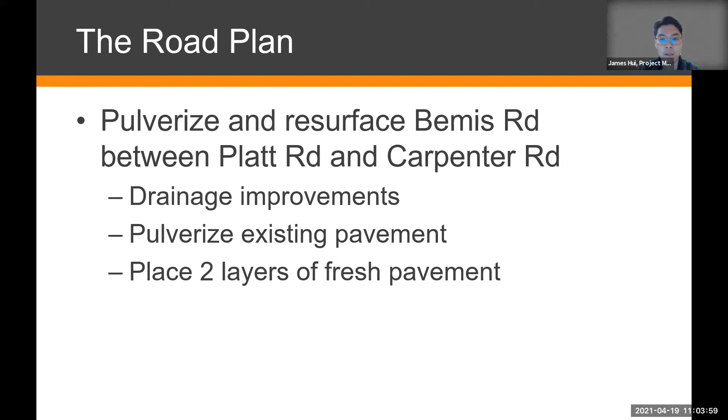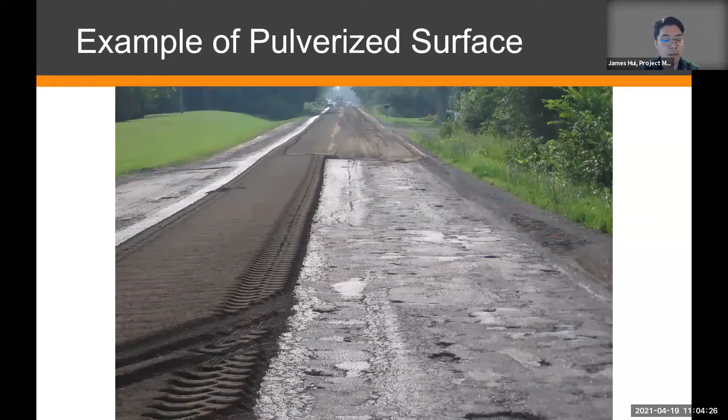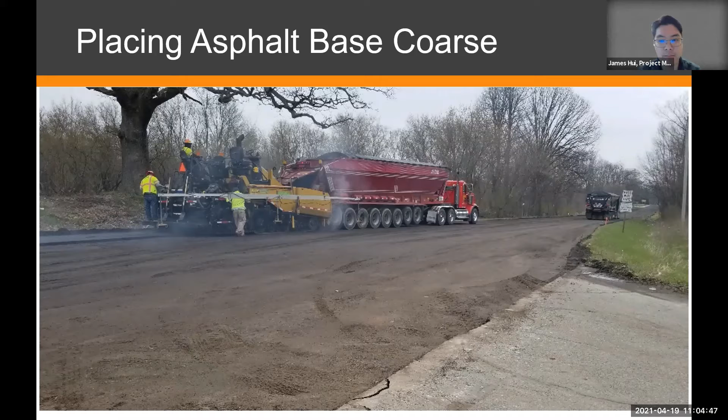So once we pulverize it, we'll definitely have to tamp it down and make sure it is stable before we put our asphalt down. So here's a picture of us actually putting asphalt material down on a pulverized surface on a separate project. Next slide. And I will pass this off to Brent to talk about his intersection job.

Thanks, James. So the intersection of Bemis and Carpenter was included in the countywide millage that was voted on by the residents within Washtenaw County, and it was slated for this coming year in 2021.

So we went through and designed the intersection. It was planned as a traffic signalized intersection through the millage. Whenever we look to improve this intersection, we look at the intersection as a whole, and we look at the laneage. There were currently left turn lanes on Bemis Road, and there was actually a right turn, southbound right turn lane on Carpenter. So it just made sense to finish and widen it out based on the right of way that we had available.

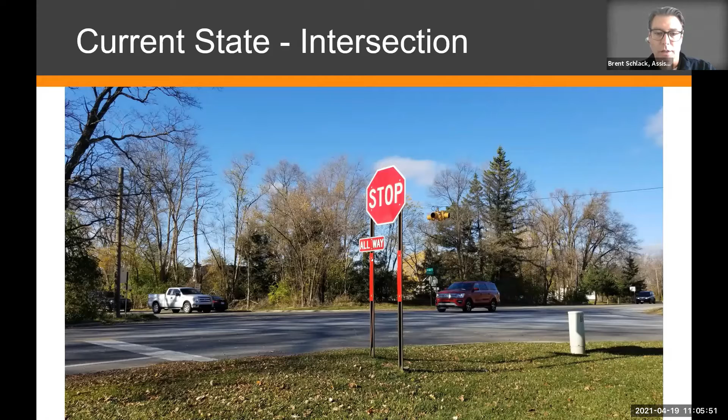It just made sense to continue with the traffic signal. So we will be widening Carpenter Road to include, through the schedule of events, there are a couple utilities that will need to be relocated. We'll be widening the road for a center left turn lane on Carpenter Road. This will include new curb and gutter on the radiuses for the intersection.

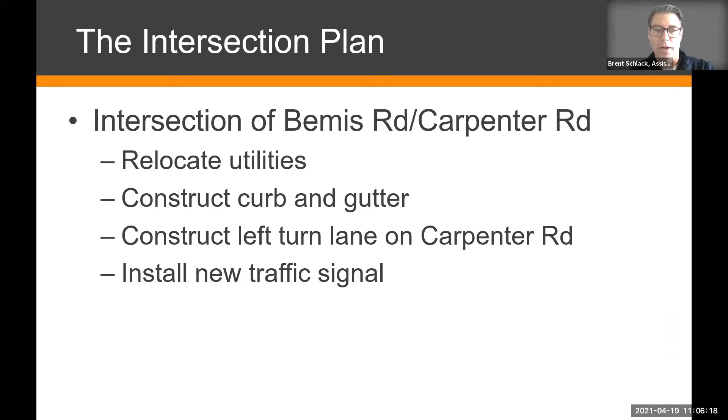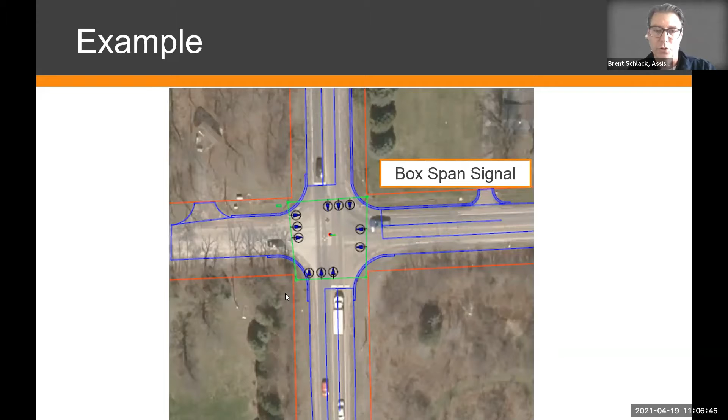So just to talk about the timeline and construction schedule, Bemis Road is slated to start as early as next Monday. This is when we'll start working on the ditching work and removing and replacing a bunch of the culverts. It's slated to finish around late May to early June, really depending on the weather and our contractor's schedule. We'll definitely provide a more detailed schedule once we receive it from the contractor.

And then the intersection itself will start after the resurfacing work is done. We're anticipating this to be in mid-June at the earliest, and it'll take about 8 weeks.

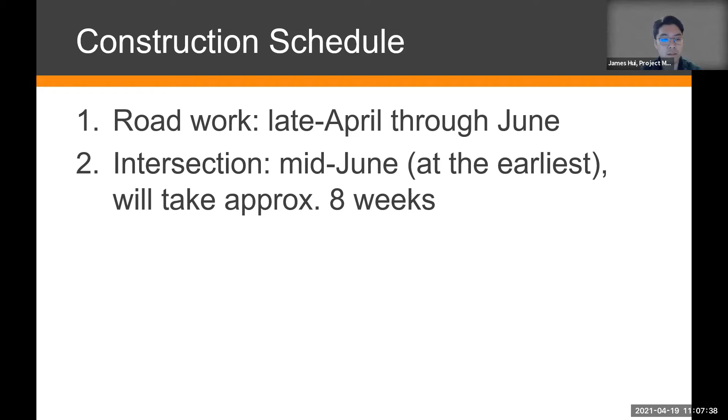For impact to traffic, Bemis Road, while we do the resurfacing, will be closed to through traffic. This means those that work and live within our project limits are still allowed access to the property, but other traffic utilizing this road as through traffic will not be allowed. The intersection, when we do the work, will remain open. There will be intermittent shoulder or lane closures, but the intersection will be open through the project.

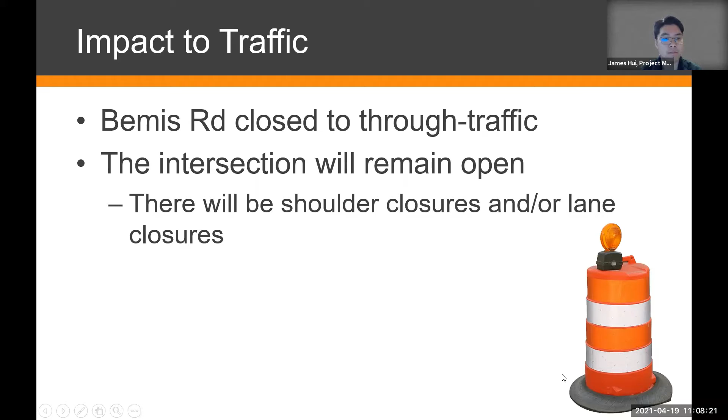As hard as it is to believe, road closed signs don't always help everybody understand that roads are closed. We've had a lot of incidences where people drive through signs, ignoring our closures and warning signs. If you do see a road closed sign, please be aware and adhere to it.

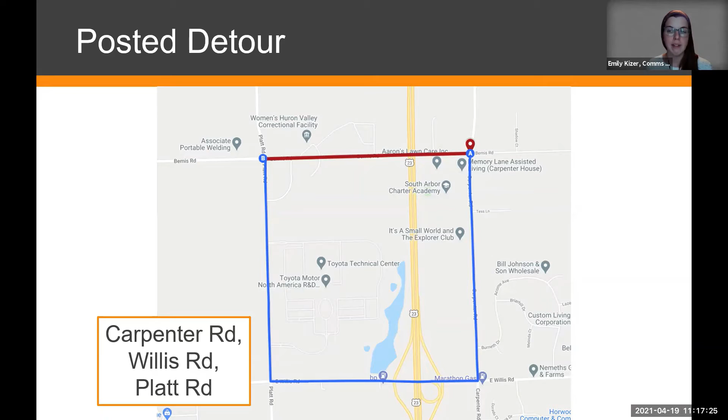Thanks, Aaron. Yeah, I think it's really important, the safety part. As Aaron mentioned, we've seen incidents of people violating work zones, and we've actually seen some fatalities—fortunately not with our employees or contractors, but certainly of road workers in the county. So we really ask people, those signs do apply to you. We will provide you access to your home if you live within that work zone. But if you don't live within the work zone, please follow the detour or find an alternate route, because it really comes down to safety for you as a driver, and for the workers out there.

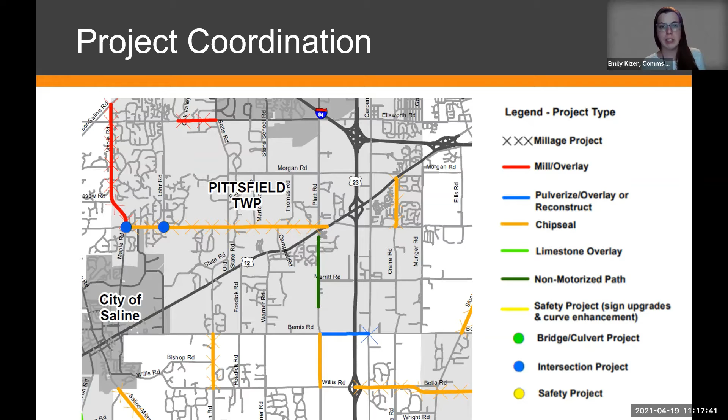We also mention that the closure applies to pedestrians, and it applies to people using bicycles. So really, if you don't need to be in the work zone to get to your home or business, we ask that you stay out of the work zone, and we'll try to get this road reopened as quickly as we can.

So with that, I'm going to pause my screen share here for a second. I'm going to show you how you can find out more about this project.

So if you go to the Road Commission's website, wcroads.org, that's what I'm showing you here. We have a lot of information here to provide a wide variety of information for the public. One of the things we spend a lot of time updating in spring and summer is our roadwork information. So if you go to roadwork and construction and find our current projects map, James mentioned we do have a lot of projects in this area. This is a great place to find all the information as we go into the construction season.

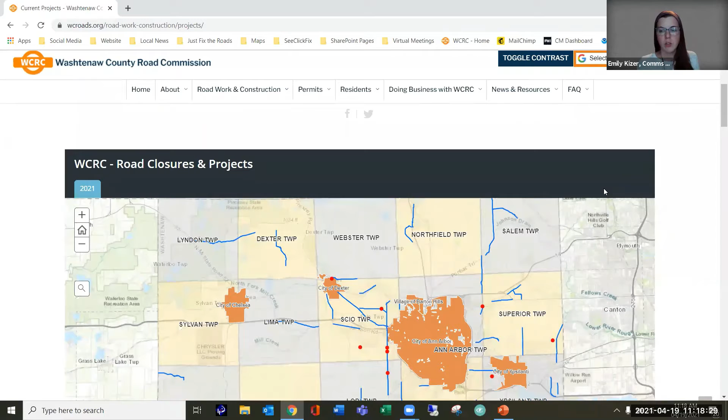If you're a maps person, you can find the map of all our current projects here. These are our major projects, generally classified as primary roads. You can see the road and intersection project on Bemis Road. If you click on the road segment, you can open this more info, which is the project page. If you go back to the map, if you're not a maps person—well, we all are at the Road Commission, we love maps—but we also have the projects listed here in a tile. Either way, it'll get you to the project page.

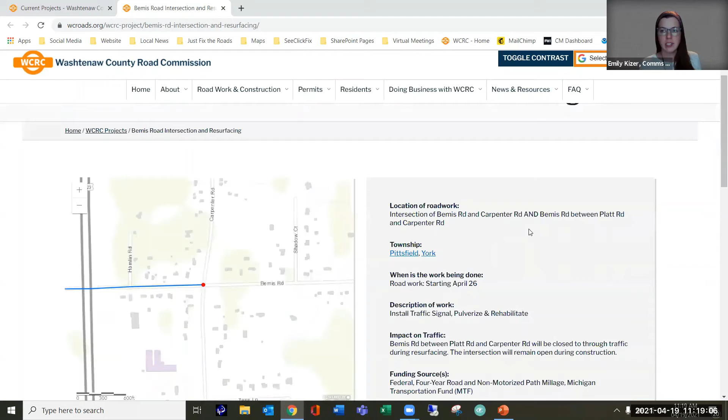Each of these major projects has a page like this. Here's the one for Bemis Road, the intersection and resurfacing. You can find some of the details here. Then we've got James's contact information, a link to the detour map, and information about today's meeting.

And right here, you can click to subscribe to receive project updates. If you'd like an email update, we'll try to send one about once a week or so, depending on how the project is going. You can subscribe to receive them here—just click this button, and it'll take you to this page where you can subscribe to receive all sorts of road updates.

Shameless plug—we do a lot of other road updates, not just project-specific ones. So you can put your email address in there. We do advisories about road work by township. So if you're interested in things going on in York Township or Pittsfield Township, you can subscribe to receive those alerts here.

You can also say you want to receive our weekly roadwork schedule that we send out. We just sent our first one for the season last week. That goes out every Thursday morning, and it's a look ahead at what roadwork we anticipate for the next week. We also do a quarterly newsletter, again with advisories about road closures and lane restrictions by township. And here you can see all our different projects, the big projects of the year that we're doing individual updates on.

So we've got the Bemis Road resurfacing and intersection project—you would just select that and subscribe to receive those updates. We just wanted to show people how to do that, but we've got lots of other information on the website. You can find the weekly roadwork schedule here as well, to see what work we've got coming up this week that was posted last week. So just a lot of information out there for you to find.